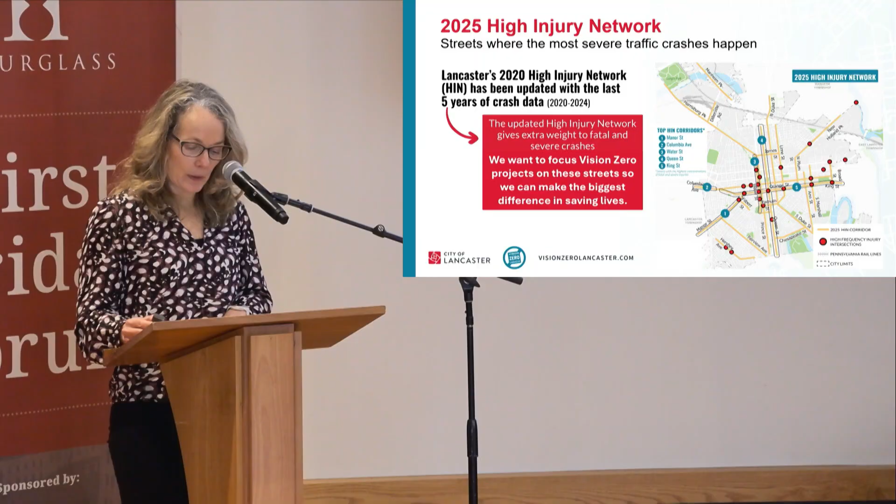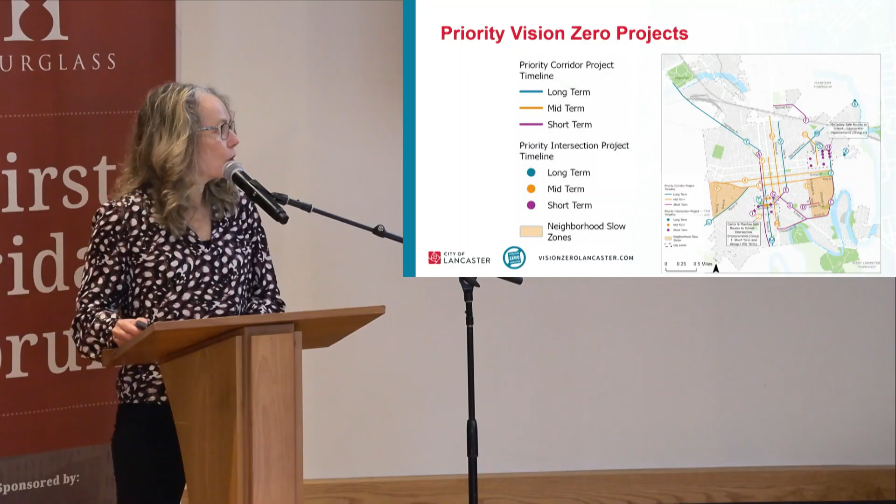We are also using a common toolbox of various treatments for any of these projects, depending on the goal of the project. A lot of these tools you will already see throughout the city, such as the daylighting I mentioned, rectangular rapid flashing beacons, curb extensions, and things like that. There are some you'll probably start to see more as we implement additional projects, including speed humps and shared use paths, just to name a few.

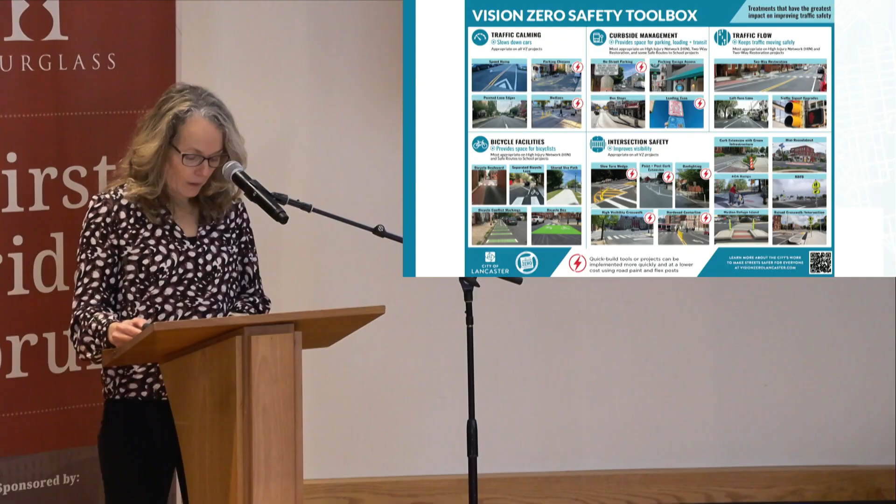Just to highlight the projects we're working on related to the Safe Streets for All grant, it includes basically 4 different buckets of projects.

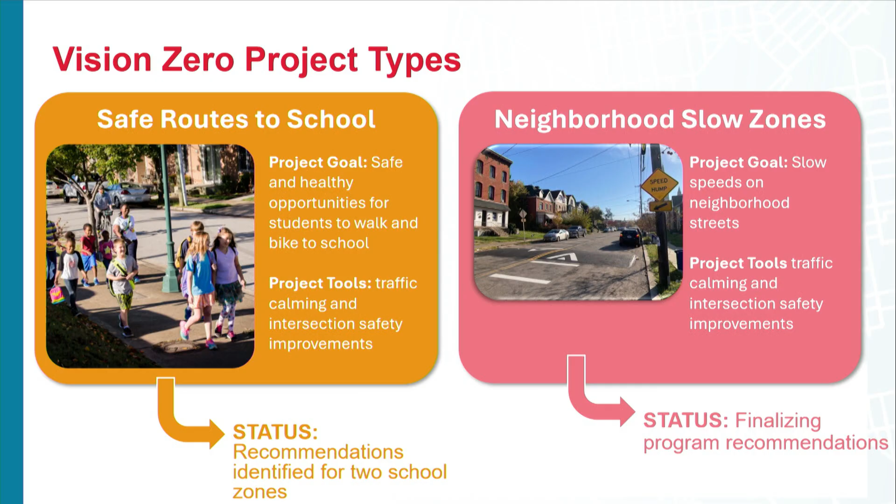The first one is Safe Routes to School. Knowing that most kids have to walk to school or don't have transportation, we're trying to make it safe for them to walk and bike to school. We've identified 2 schools that we're progressing with design on. One is Carter and MacRae, so around Prince Street, Beaver Street, Conestoga Street, trying to improve safety immediately adjacent to that school. McCaskey campus was another one we looked at. Franklin Street improvements are going to be happening related to that project as well.

Then we also have a neighborhood slow zone project. We hear a lot of complaints about speeding within neighborhoods, so we wanted to identify a way of prioritizing that based on need, focusing on the highest crashes. We anticipate at the April open house related to this project that we'll be rolling out recommendations for that.

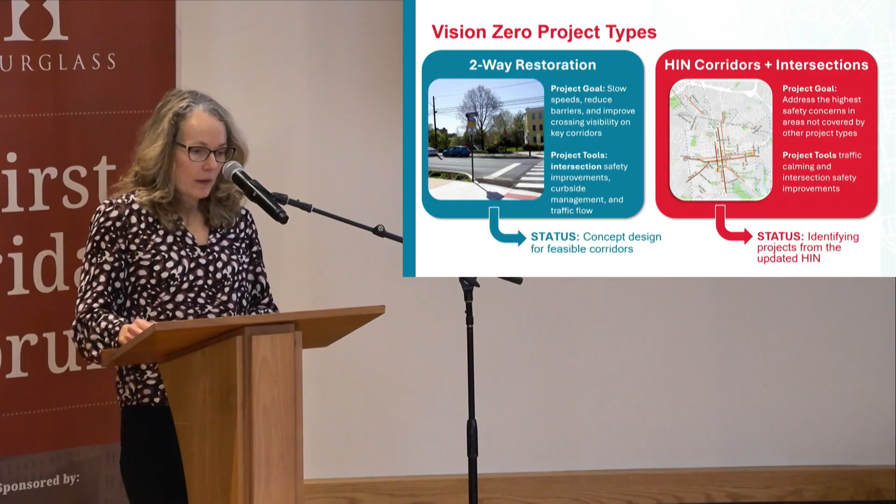And then finally, we have the 2-way restoration, which Laura's going to talk about in more detail. We'll also have another project that deals with high injury network corridors and intersections that weren't specifically addressed in some of those other projects. So there's a lot going on in the city, and we're excited to continue the work we've been doing.

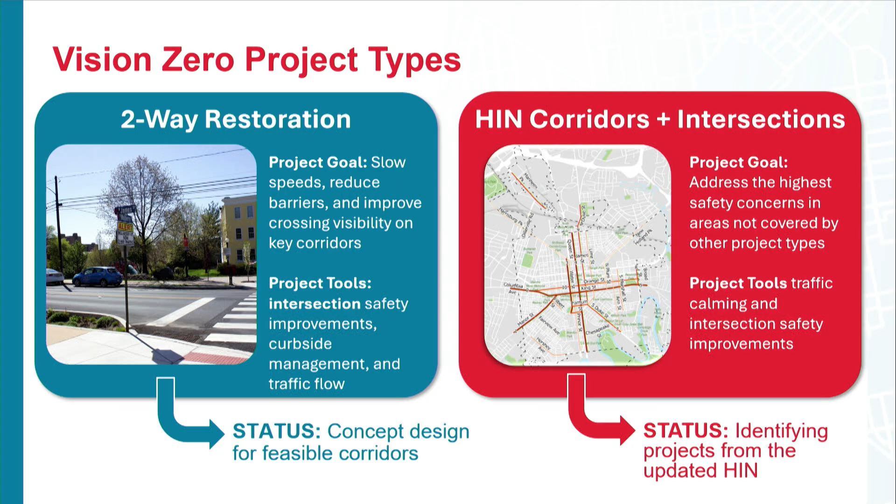So I'm going to hand it over to Laura to talk about the 2-way restoration.

All right, thank you, Cindy, and thank you so much for having me here today. I work with a lot of different communities about improving safety, and I can tell you it is such a joy to work with communities like Lancaster that are so committed to really getting projects in the ground to make changes in your city. You are very lucky to have the city staff that you do, who spend day in, day out really figuring out how they can get these projects in the ground.

Cindy talked about all the different Vision Zero projects the city is advancing, and one we've been working on is 2-way restoration. When you think about that, our streets in Lancaster, when first designed, were designed for 2-way travel. Over the past several decades, like many cities, they've been converted to 1-way travel. The reason is that it's much faster and easier to move cars through the city if you've got 2 lanes traveling in the same direction. But that doesn't necessarily lead to a great pedestrian environment if you're not just trying to get the cars through—you want to get the people through too. So we're looking at ways we can convert some of those 1-way streets back to 2-way operations.

So let's talk about some of the benefits of two-way streets before we dive into it. The biggest one is improved safety. This is a Vision Zero project, and at the forefront of all Vision Zero projects is getting down the numbers in terms of fatalities and severe injuries.

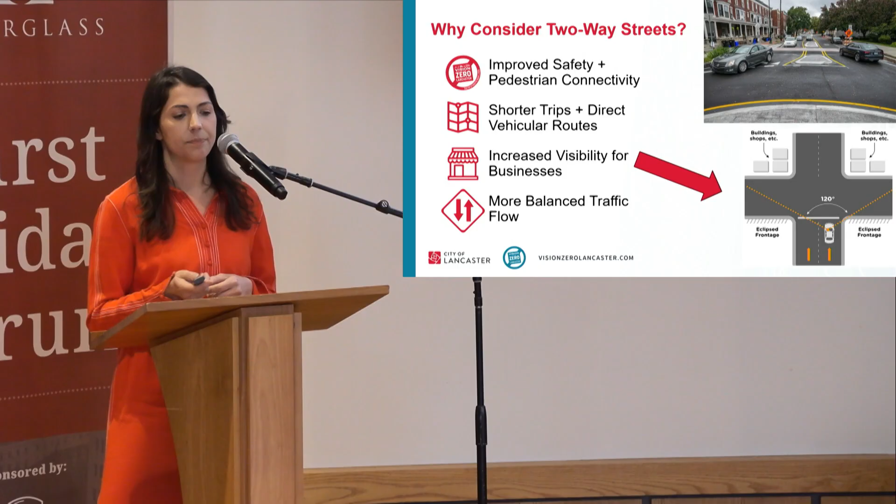Another big one is increased visibility for businesses. In the diagram here, you can see a vehicle heading north. There's two lanes heading north. They cannot really see the businesses on the south side of the street they're crossing—they can only see the businesses on the other side. Since that road is always heading north, they never see the businesses on the other side.

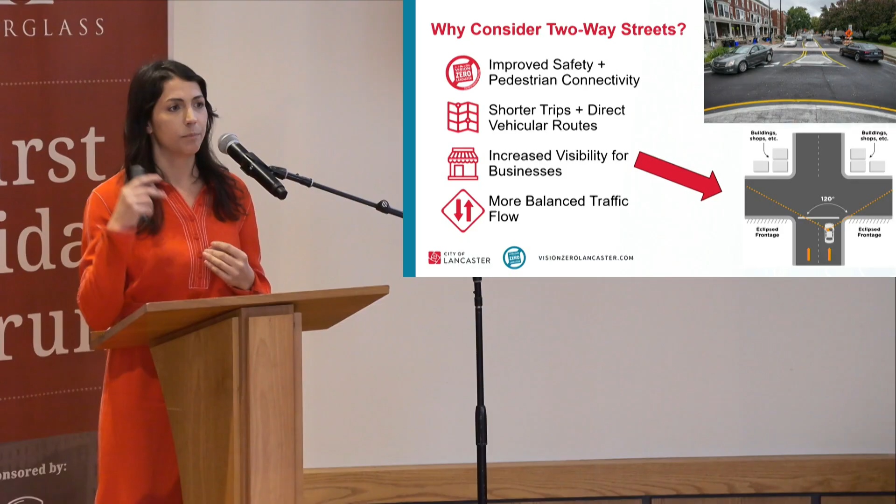Versus if you had two-way travel there, you're going to see people have much more visibility of the businesses that are there, as opposed to just taking the same route and having no idea there's a coffee shop on the south side of the street. We found that a lot of communities that converted their one-way streets to two-ways see a lot of increased benefits on the business side of things.

And overall, it just leads to more balanced traffic flow. There's limited routes in and out of the city, certain corridors that folks are coming in on. This just allows you to really balance things better between those east-west and north-south movements when you have two-way operations.

The photo on top is actually from a two-way conversion that occurred in the city of Harrisburg on North 2nd Street. This was a major traffic fatality corridor in the city—it was a huge barrier in the community. And the benefits of this have just been huge: speeds are down, crashes are down.

I will also add that whenever we make changes to our streets, it causes a lot of feelings. These are our streets, they are ours, and there were a lot of concerns about this project before it went in. There's actually a headline of someone quoted afterwards saying, 'Second Street project, not a disaster like I thought it was going to be.'

So it's kind of this recognition that once we're used to the way streets operate, we think, well, this is always the way it's going to be. But first of all, they were two-way back in the day, and with proper engineering and planning improvements, we can make them work great in their new configuration as well.

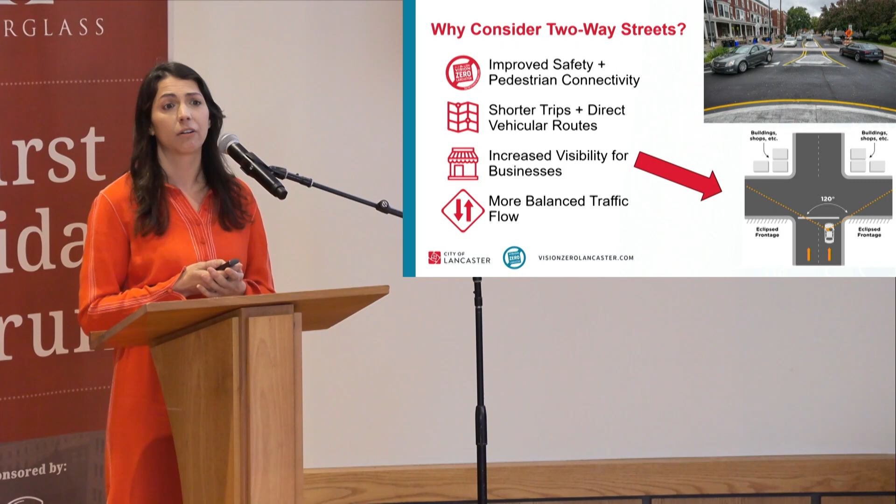So just to talk a little more about the safety benefits—again, the biggest impetus for this two-way restoration project is safety, but there are those other livability benefits as well. We're going to reduce turning movements, all those times cars need to turn to get around the block to get where they're going. That's cutting down vehicle and pedestrian conflicts and really reducing all that out-of-direction travel.

Another big thing about two-way streets is that they naturally slow traffic down. When you have oncoming traffic towards you, you feel much less safe going faster. As Cindy brought up earlier, a big tenet of Vision Zero is reducing vehicular speeds, because every 5 miles per hour faster a car is going, if it hits a pedestrian or bicyclist, their chance of being severely injured or killed goes up exponentially.

So we are always trying to keep things at that 25 mile per hour or less, and going to two-way streets is really going to help you get there.

Another big safety benefit is the increased visibility of pedestrians at intersections. Cindy talked about how with daylighting, we're doing things to make sure that cars aren't parked right up to the intersection, so they can clearly see when pedestrians are in the crosswalk. That works very well at two-way streets.

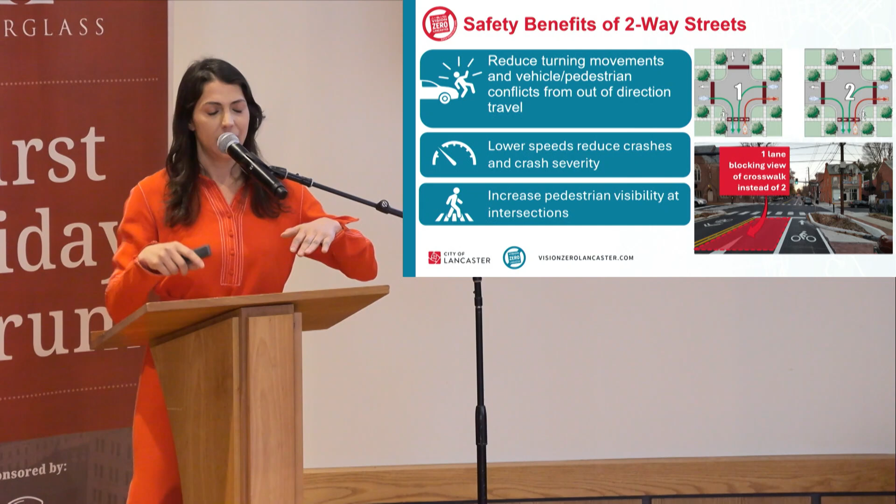One-way streets have a challenge you can have. Who has ever been trying to cross on the Christian Street Bikeway where it crosses one of the one-way streets like Orange or King? Do you ever find that the vehicle closest to you, with two lanes, sees you and waits, and then the vehicle next to them in the other lane is like, why is that fool stopping and waiting here, I can just go? Then they're moving and they don't see that pedestrian in the crosswalk. That can be really challenging.

If you look at the photo we have here, this is on Charlotte or Mulberry that has had that two-way restoration. That vehicle traveling northbound can clearly see who's in the crosswalk, and anybody coming on the other side can see that as well. So that helps that visibility so much.

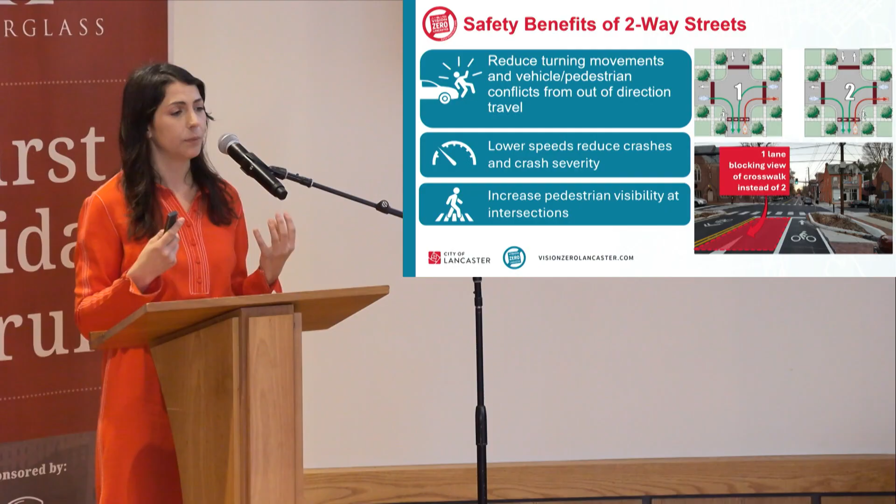And when we did a survey about two-way corridors, one of the consistent things we heard was people not yielding to pedestrians in the crosswalk. That is something we're really looking to address citywide, and the two-way study can really help us with that.

In Lakeland, I think they were sitting at around 50% vacancy prior to the two-way being implemented. Then after the two-way, they're just seeing a lot more demand on the business side. The businesses are doing better. These are places that people want to be walking and biking, and it's really increasing that overall quality of life and sense of place.

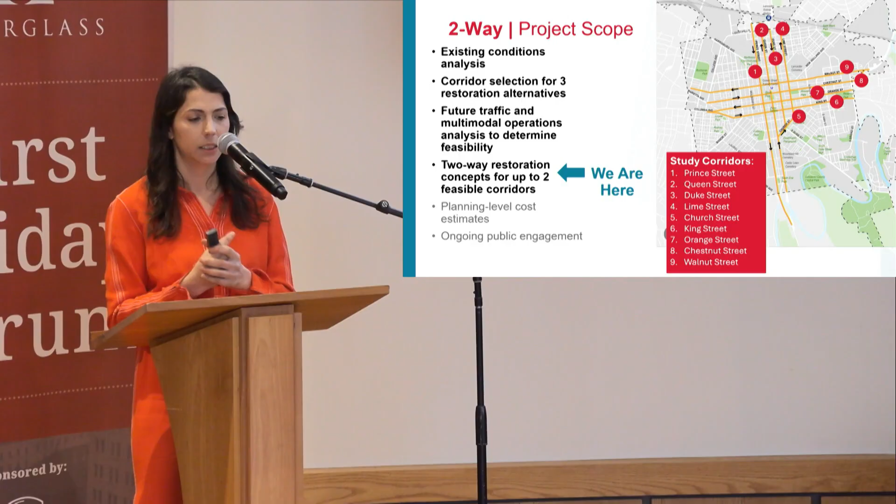All right, so let's talk about what we mean when we talk about two-way restoration in the city of Lancaster. We started the project by looking at 9 different corridors throughout the city.

These are corridors that I'm sure many of you are very familiar with - key corridors like Prince and Queen, Duke, Lime, Church Street (our one diagonal one), and Orange, Chestnut, and Walnut Street. We started by saying, not necessarily that we think all of these should go to two-way, but we wanted to have a better understanding of how they operate and how feasible, doable, and successful it would be to convert any of those streets to two-way.

So we started just by looking at existing conditions of all of them. Part of that was a detailed traffic analysis. A lot of these are PennDOT state routes, and when you have a PennDOT state route, you need to make sure that any changes you are making to traffic or operations is going to work well. So we did a robust traffic analysis on all of these to look at counts, to see how they operate today, and then test out how they would operate in the future.

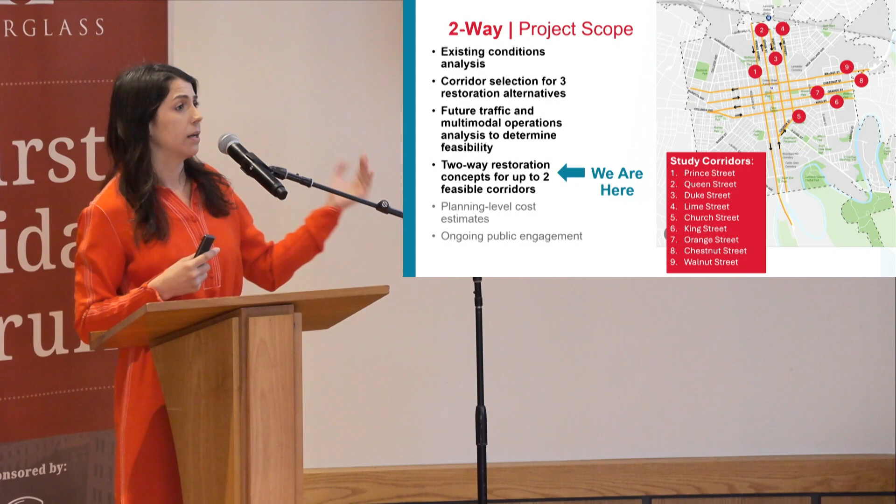However, we are looking beyond just the traffic itself. We wanted to understand how they operate as places where they have more dense residential uses, key spots that people want to be walking and biking to, key emergency services operations, parking demand, and where we have transit operating. So we did a lot of analysis to better figure out just how all those 9 corridors are operating today.

As part of that, we then did a whole screening analysis to figure out which ones are most suitable for two-way, and then narrowed it down to future scenarios - taking 3 future scenarios and testing those out in that future conditions analysis to see how they would operate, how the traffic would work, and how some of those other operational challenges could be addressed.

And then from that analysis, we narrowed it down to the corridors that we think are most feasible to convert to two-way. And right now, we're actually working on the concept designs for how we would need to redesign those streets, redesign those intersections to allow for that two-way traffic.

Moving forward, we will be doing some planning level cost estimates for those corridors so that the city has a better understanding of how much it would cost and how they can leverage that federal funding to do further design and construction on the feasible corridors.

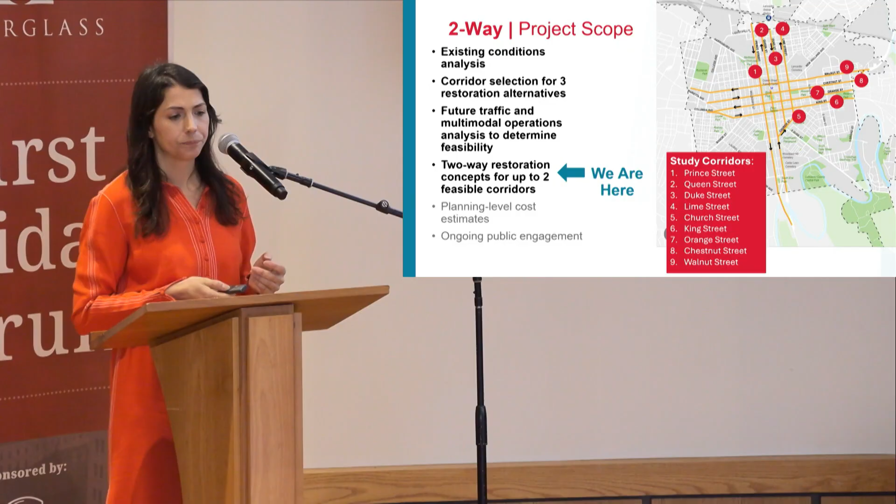And then throughout this, we've been doing ongoing public engagement. I'm sure many of you attended the Vision Zero open houses that took place in the fall and the summer, where we were presenting some ideas and getting feedback. We had an online survey. And we also did a lot of that outreach when we were in the middle of existing conditions and leading into our future conditions analysis.

And then we will be coming back to the public when we have those draft ideas of what the corridors and the intersections could look like. We'll be doing that in the spring and then wrapping up the study over the summer. And again, the study is meant to see which corridors we think are most feasible to go, and then set the city up for success for future design and construction of these corridors.

So everything that we're talking about today is still at this kind of high-level planning, and we're trying to get some understanding from you all today of key things that you think our team should be considering as we develop these ideas.

One of the ways that we gathered feedback on the project was to have a series of stakeholder meetings. We recognize on these streets they are serving a lot of different users, and sometimes those users have competing demands for that very valuable road space. So we had meetings where we were able to better understand what those different groups' needs, issues, and opportunities are. We talked to the business and active transportation community, had a meeting with emergency services to understand their operations, met with Red Rose Transit Authority, and also had a meeting with the Lancaster Parking Authority.

And from the feedback from those stakeholder meetings, as well as from our online survey that we had open over the summer, and just from conversations with folks, we kind of coalesced around a couple areas where we feel like folks are in agreement, and a couple where, depending on your perspective, there might be some disagreement.

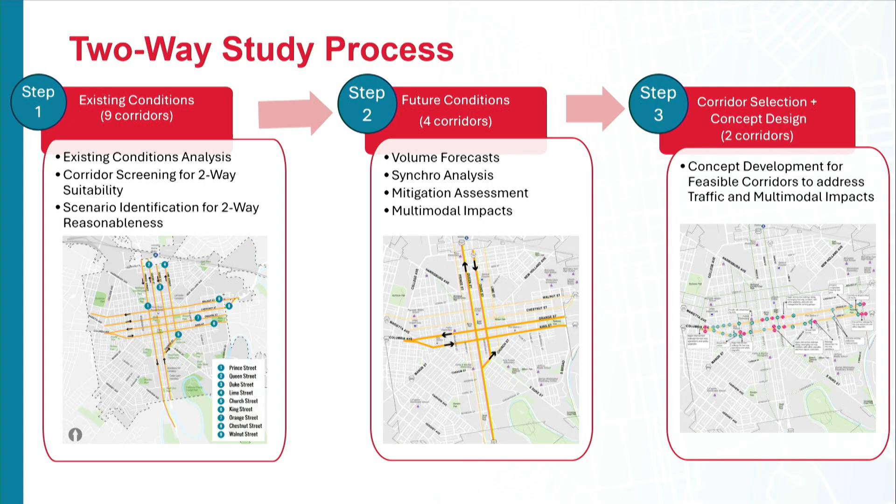So when we identified our future scenarios, we had one in the east-west, King and Orange, and we had one in the north-south, Duke and Queen. Then we ran all of our future conditions analysis to figure out which ones of those are most doable, and from that we got to our 2 feasible corridors: Orange and King.

I'll just walk through each of those in a little bit more detail. So I talked about how we did our existing conditions on all 9 corridors, and then we did what we are calling corridor screening to say which ones of these are most suitable for two-way. We looked at all that public feedback and stakeholder feedback that we received. We looked at the roadway context, the character of the roadway, the width of them, how much parking there is, how much parking is used, if it has transit. We looked at the safety characteristics of the streets. From that, we came up with a scoring system.

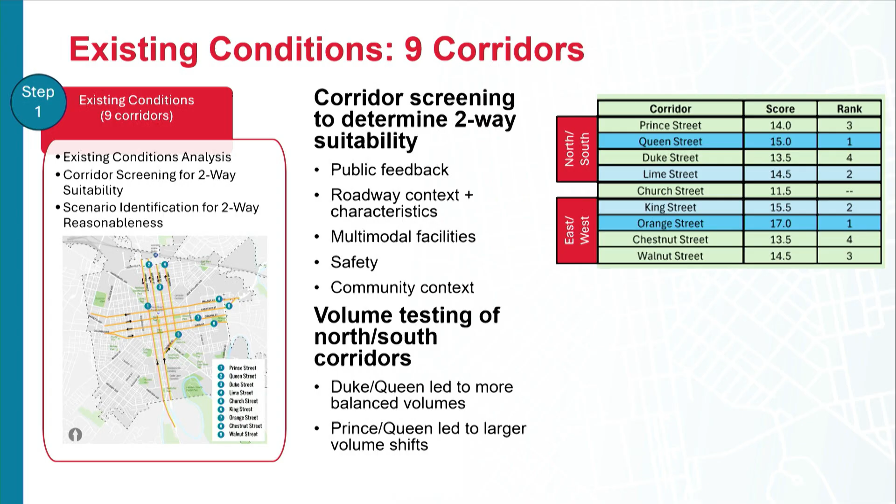On that scoring system, the east-west was pretty clear. King and Orange in the east-west directions were the 2 corridors that we felt made the most sense for a successful two-way restoration. On the north-south side, it wasn't quite so clear. Part of that is just that on the north-south, you don't have as many corridors that go all the way north-south, right? Our east-west ones are much more comprehensive, so it was a little bit more challenging to figure out which north-south made the most sense.

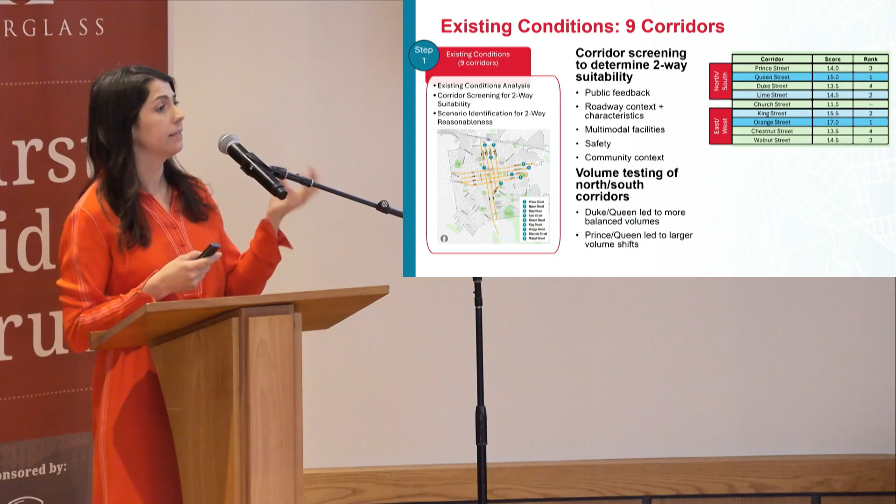So we did a little bit of testing on the volumes to understand at a high level where we would anticipate travel volume shifting in that north-south direction. From that, we identified that Prince and Queen would not be as beneficial of a north-south pairing, just because of the way the volumes would play out. But Duke and Queen would be a better candidate for that two-way suitability, based on the way the volumes were shifting there.

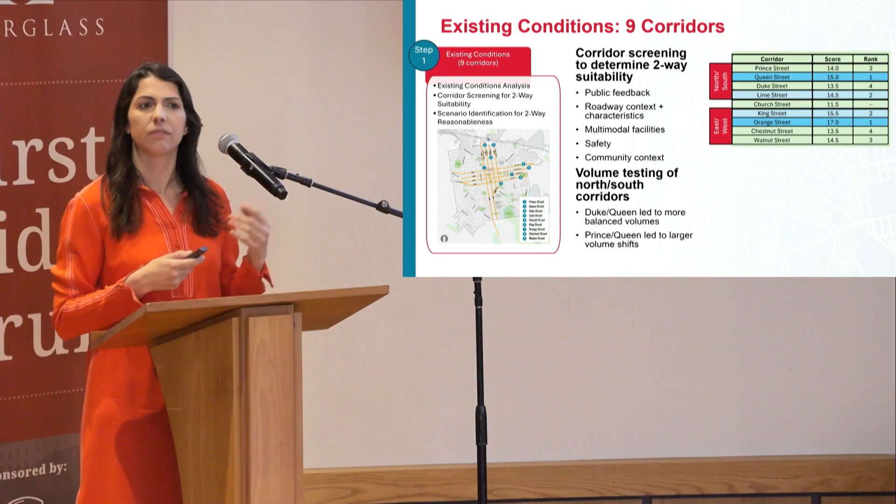So that's how we got to the 3 alternatives that our team looked at to run all the traffic on. The first one looks at what happens if we just take King and Orange Street, that east-west, and those are the 2 corridors that we convert to two-way.

Then our second alternative in the north-south direction, what if we just take Queen and Duke? We do have a block of Church Street that connects Queen and Duke, which would also be part of that two-way. So that was alternative number 2.

And then alternative number 3 says, what if you do all of it together? You do the east-west on Orange and King, and you do the north-south on Duke and Queen and the partial Church. What happens if you do all of them?

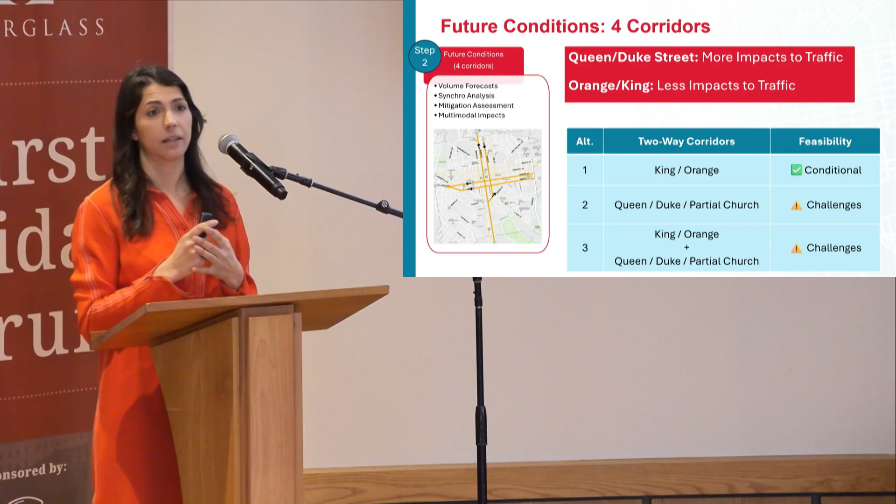And what we found in looking at the traffic analysis on that was that when we do the north-south on Queen Duke, it causes a lot of challenges on the traffic side of things. When we do it on King Orange in the east-west, the traffic ends up getting pretty balanced between those 2 corridors. There are a couple spots that from a traffic perspective, we would need to add a turn lane or make some changes to signal timing so that vehicles could continue to move through there.

But on Queen and Duke, those challenges were a lot more difficult to overcome. What we were seeing on the traffic side is to make traffic work on those corridors, we would be adding even more turn lanes. We'd be changing the signal timing in a way that makes it a lot harder to walk or bike through those intersections. Some of the mitigations we were starting to look at were actually going against what we want out of a Vision Zero project.

So are these actually going to get us the outcomes that we're looking for? And that's why we decided to focus for this first phase of two-way conversion in the city of Lancaster on the east-west of King and Orange.

Now, that doesn't mean that someday there could not still be a two-way conversion done on other corridors. This is just saying, for the purpose of advancing the project forward, picking 2 corridors that are most feasible, and then moving them into future phases of design and construction. King and Orange were identified as the best ones for that.

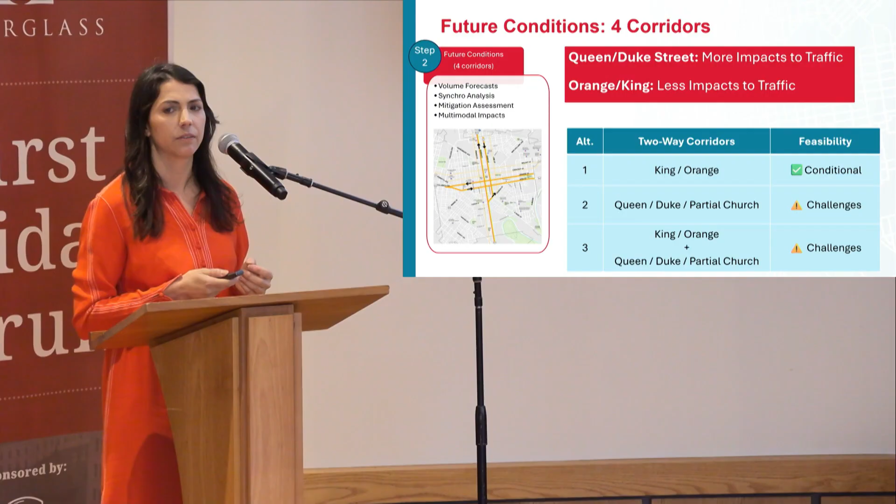So that concept design phase is where we are right now. We're in the process of identifying that toolkit that Cindy shared earlier, of all the different Vision Zero tools that we have at our disposal, and where they're most appropriate along the King and Orange corridors.

And where do we need to do some of that additional thinking around loading and access to parking garages, and access for emergency services, and thinking through transit operations? Where are all the spots that we need to be employing those tools and thinking about things on the design side? And we're looking at that corridor-wide for both of those.

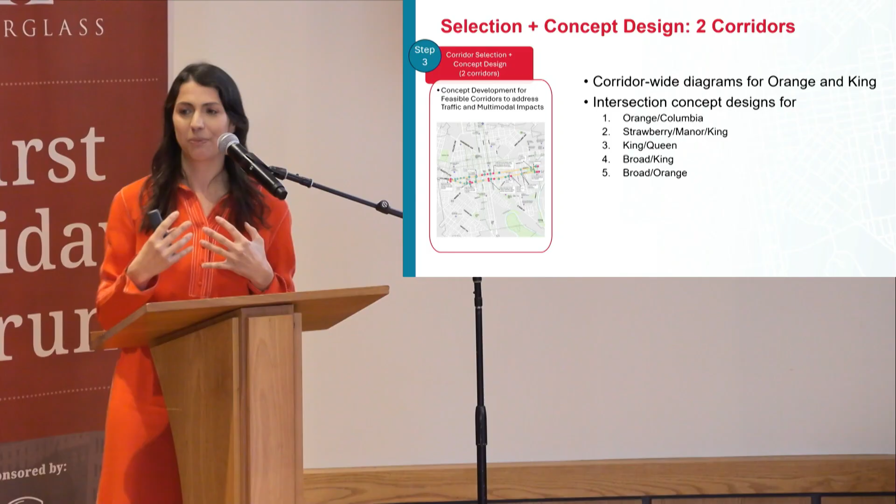And then we recognize that there are certain intersections along those corridors that have a lot more going on, that need a lot more detailed design. So we are developing concept designs for the Orange and Columbia intersection, the Strawberry Manor King intersection, and the intersection of King and Queen, which I'm sure a lot of you are thinking about right now and saying, how is this going to work? That's part of our conversation today, so please save those thoughts.

And then the terminus of both of the corridors at Broad Street, so the intersection of King and Broad, and Orange.

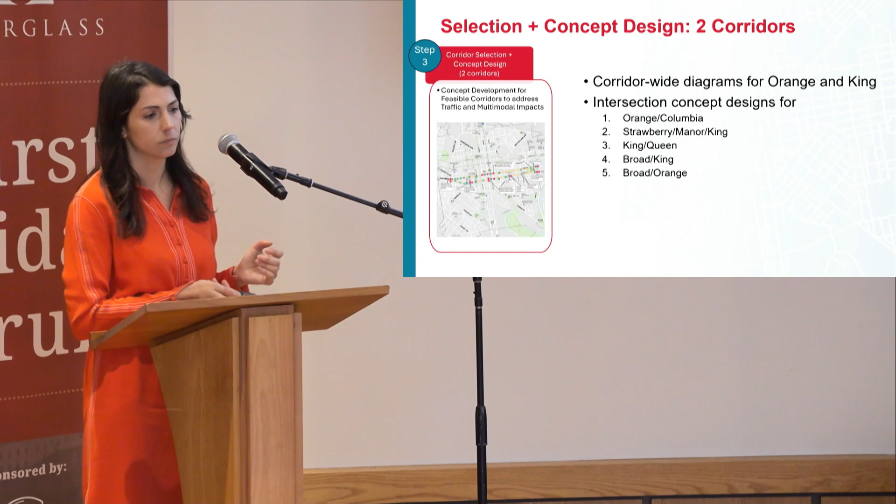We're also thinking about how both of these corridors have a lot of spots where existing or future bicycle facilities cross them. So we're thinking about how we're connecting to those bicycle facilities and the different types of treatments we can put at the intersection to make it easier to get between facilities.

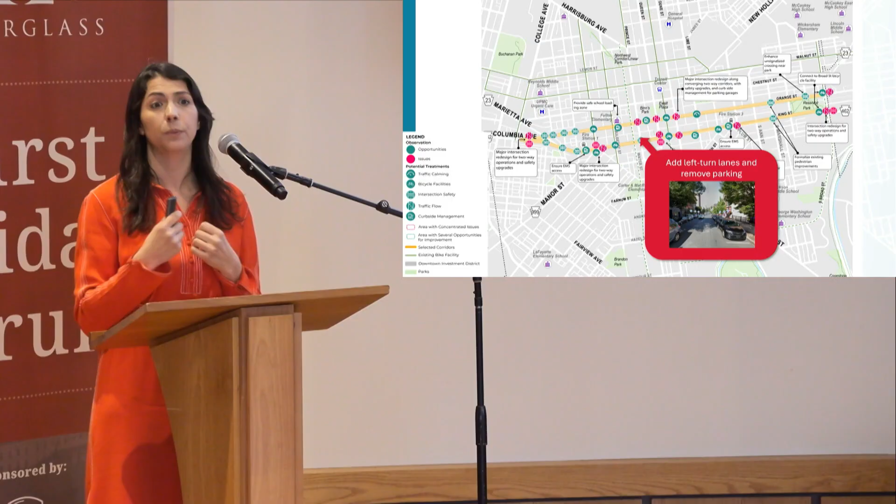We have certain locations where we are adding turn lanes. There are 2 locations on King Street where the traffic analysis shows us we would need a future turn lane. To make room for that turn lane would mean removal of parking in those areas. So that's one of the things we're looking at, kind of understanding what those impacts are.

There's a lot of locations along here where the city has already put in, as Cindy mentioned earlier, the paint and post, where you bump out the daylighting or the curb extension. One of the things our team is looking at is maybe turning that into permanent concrete curb extensions, spots where we can shorten the distance pedestrians need to be out in the street, making them more visible to cars that are crossing. Those curb extensions also help with slowing down traffic as they're turning. So that's another thing we're looking at.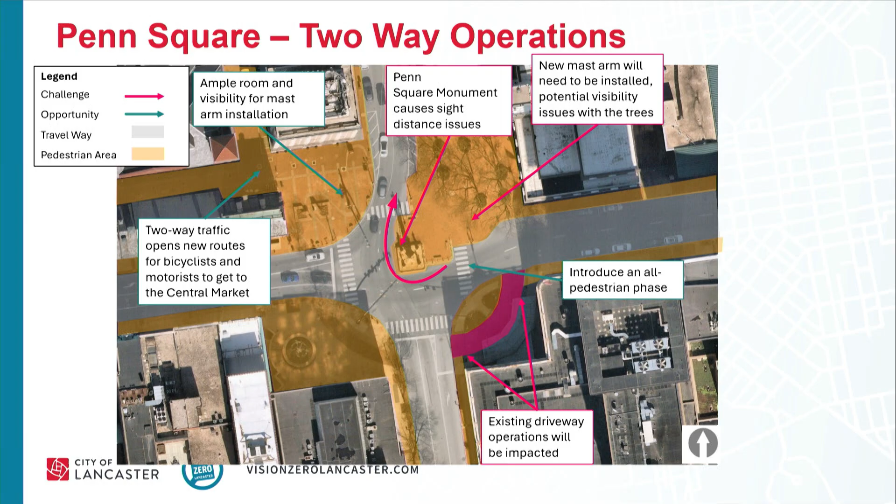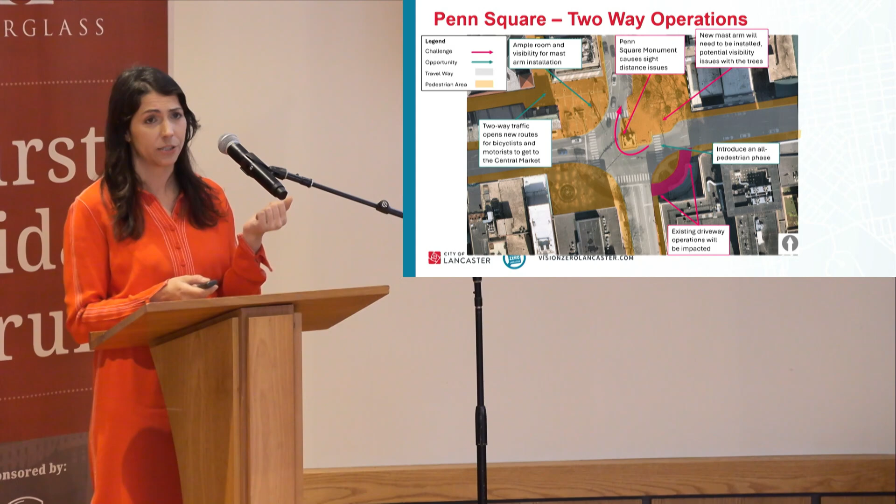We haven't gotten fully into the detailed designs yet, but one of the things we wanted to talk with you all today about, because all of them have trade-offs associated with them, is we actually wanted to use the rest of our time to chat through. We have some online polling questions to get at where you all feel like the trade-offs would work best.

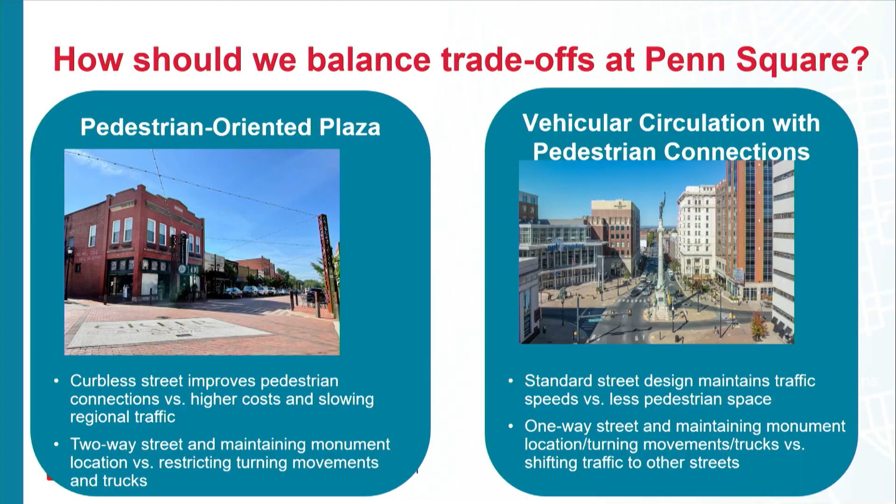So there's trade-offs with that. When we've done some initial looking at it, we could do this with keeping that street two-way and maintaining that monument location. But this would mean we'd have to restrict certain turning movements. So there's that trade-off there. We keep the monument where it is, we get our two-way, but there's going to be certain turning movements that don't work here.

The image on the right is actually in Allentown, their central square, which is going through a redesign as well. In this one, it's really more about maintaining that vehicular circulation, but also building in strong pedestrian connections as part of that. So this follows a more standard street design where the travel lanes are not raised up, maintaining, for the most part, traffic speeds through here. It's probably going to have a little bit less pedestrian space.

It may be that to get that kind of future here, we may need to have more of a one-way environment just for that block. That's something we're looking into right now. But again, it maintains that monument location, it maintains turning movements, it allows trucks to move through there. One of the downsides there is you might be shifting traffic to other streets.

So with any of these, no matter what we end up doing in the square, there are going to be these trade-offs. One of the things we were trying to get a pulse on today is where you all land on, which side of the trade-offs we should really be focusing on. I saw a hand up over here.

I've got a couple questions. In all this, one thing I don't know is what the key performance indicators are. In about 10 years, you look back and say we spent $20 million, and we achieved X. And I don't really see that. I mean, what is it? Maybe three things that you would measure 10, 20 years from now that would make this really successful.